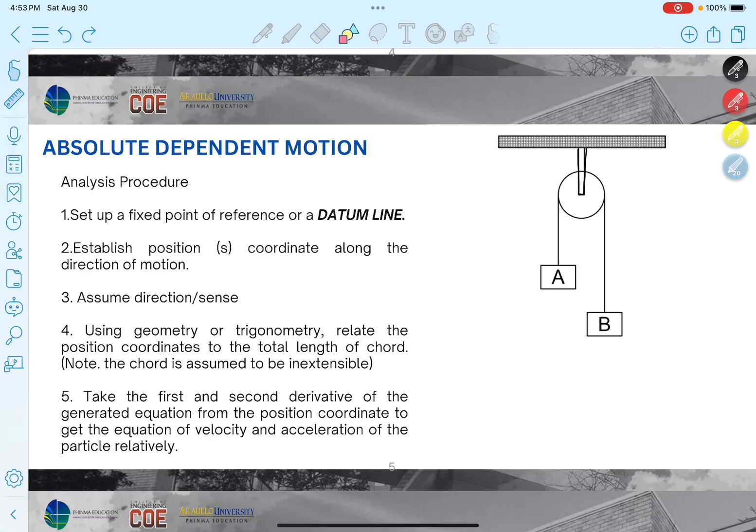So, if you read number 2, establish position or S coordinate along the direction of motion. Ibig sabihin pala, yung point ng particle na kinoconsider mo is what? I-measure mo yung distance nun from the datum line.

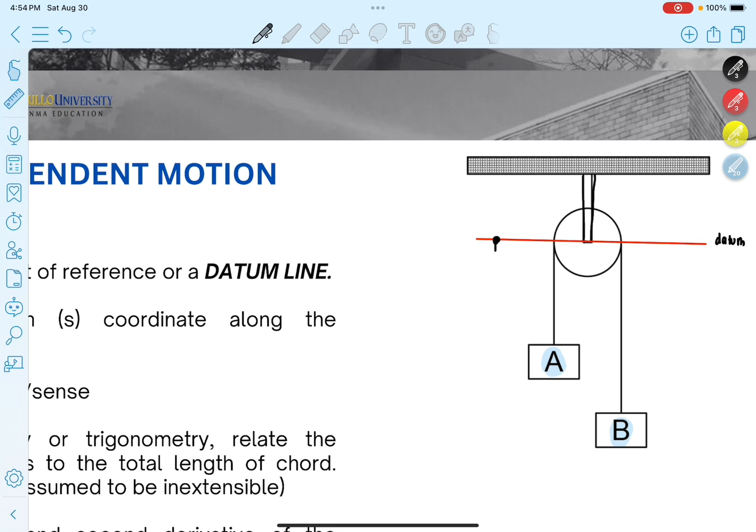Ibig sabihin, ano ba yung mga points natin dito? We have what? We have the point or the block A and the block B. Ngayon, kukunin mo daw yung position coordinate nila with respect to the datum line. So, ano ba yon? If we're going to get the position, ito yun. From datum line, bababa ka dito sa point A mo, okay? Ngayon, yung magiging distance mo dito, we can call it as our SA, okay?

Now, para naman sa B, okay? Yung B naman natin, guys, is what? Ito yung magiging position niya, okay? From datum line, we can call the position of letter B as SB, okay? So, ibig sabihin, yari na tayo for the number 2 na establish na natin yung position coordinate.

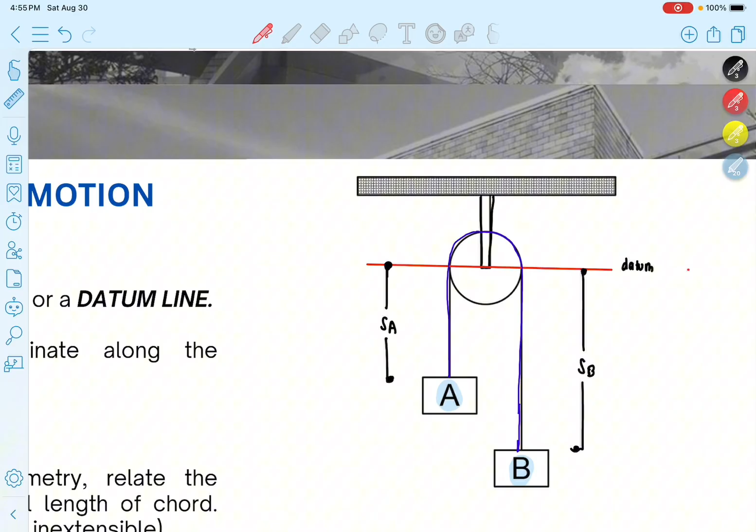So, yun. Now, for number 4, i-relate natin, guys, itong mga direction or yung mga position coordinate na to. Okay, such that yung letter B is i-connect or i-relate natin siya. Paano? Using the geometry or trigonometry, relate the position coordinates to the total length of the chord. Ibig sabihin pala, kailangan mo ma-relate yung position coordinates mo in terms of this chord. Ano yung sinasabing chord natin? Ang sinasabi nating chord dyan is this one. Ibig sabihin, i-relate natin dyan.

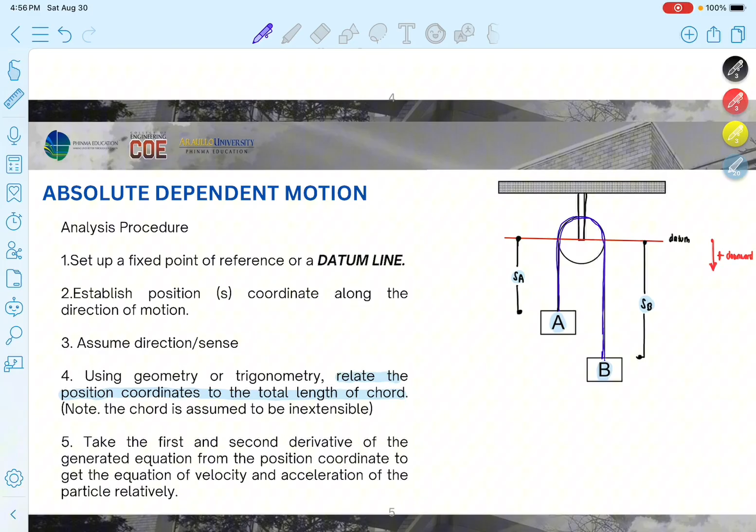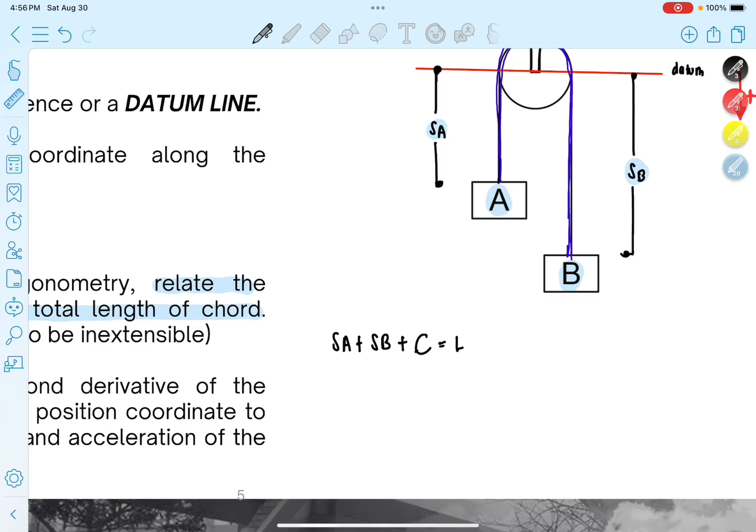Okay? Ngayon, pwede ba nating i-denote that SA plus SB plus C equals to the length? Ngayon, kung mapapansin nyo, this is the total length of the chord. Ibig sabihin, yung haba ng chord mula dito, from this point up to umikot siya papunta dito, yun yung tinatawag natin as the L or the length of chord.

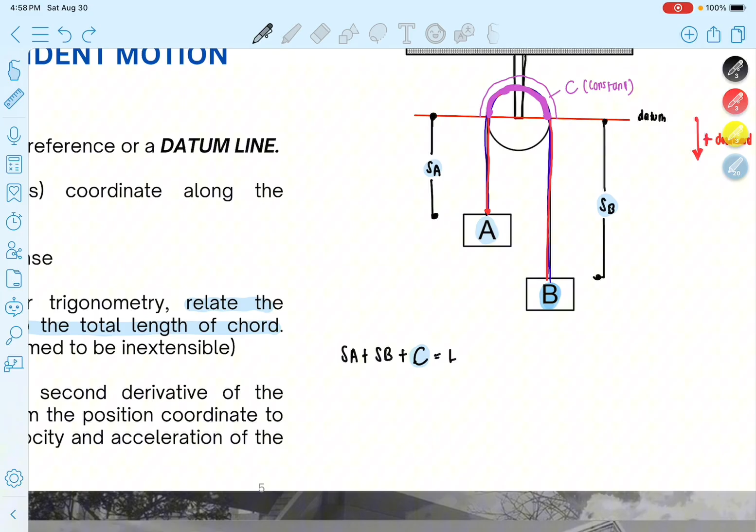Okay? And then for the step number 5, basically, take the first and second derivative of the generated equation from the position coordinate to get the equation of velocity and acceleration. So simply, pagka kinuha mo yung first derivative niyan, given that this L, again, this is an inextensible chord, this is constant, and this is also constant. So, if we're going to take the first derivative of both, yung SA natin will be VA, okay?

The first derivative of SA is VA, and the first derivative of SB will be VB, okay? And the derivative of constant, C and L, is equal to 0. Ibig sabihin, kung equal to 0, maka-cancel out na yan, di ba? Kasi ang derivative ng constant is 0.

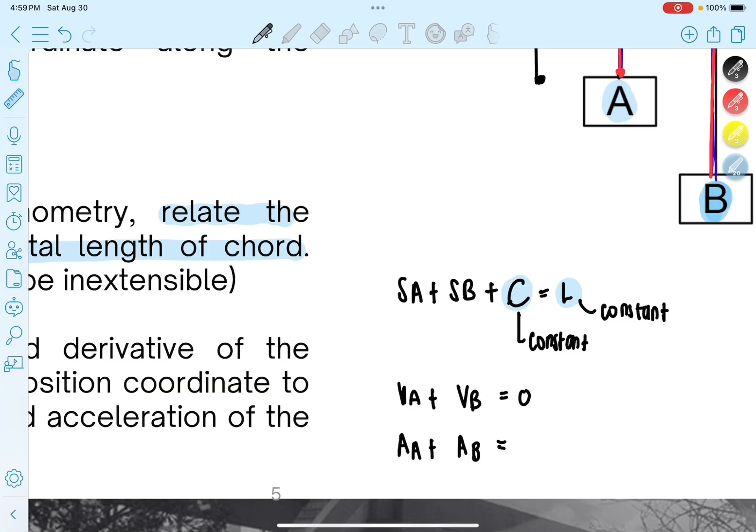For the second derivative naman, we have the AA plus the AB; also the derivative of 0 is equal to 0. So yan, technically ganyan lang yung magiging relation natin for our absolute dependent motion. Ganyan lang yung magiging steps natin. So para mas maintindihan natin, I think mas okay if we're going to take an example. Okay?

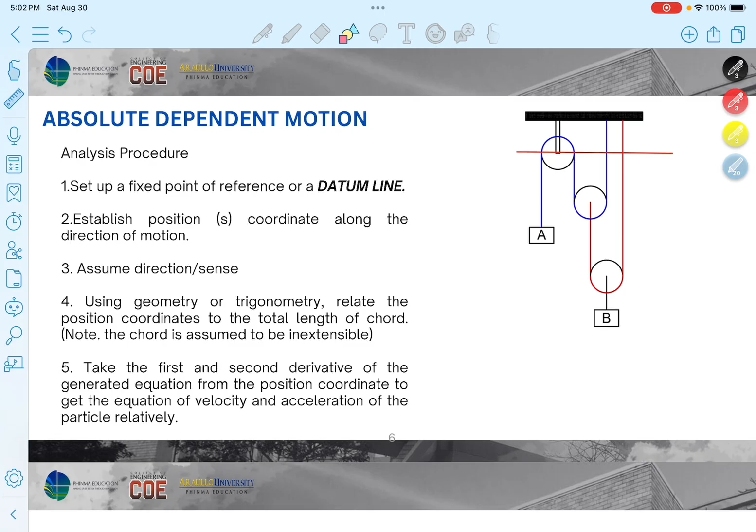Pagka nag-establish tayo ng datum line, basically always pick the fixed pulley. Ito ba fixed pulley ba yan? Hindi. Ang fixed pulley is yung nasa taas, yung naka-anchor dun sa support natin. So if you're going to get the datum line, safe if sabihin natin na ito yun. Okay, so if we're going to name it, this will be our datum line.

Okay, next step naman is establish. Dito tayo magkakaroon ng problem. Bakit? Kasi kailangan ma-relate natin yung equation into one, pero magkaibang chord sila. So mas mainam if we name this pulley as letter C. And then, establish position coordinate along the direction of motion. Ibig sabihin,

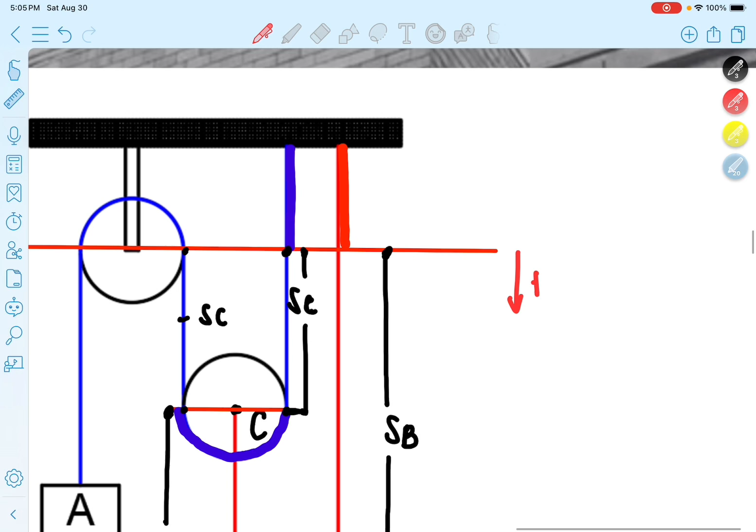Now, ang next naman na gagawin natin is assume the direction. Basically, ulitin lang natin yung kanina: that our direction is positive downward. Okay?

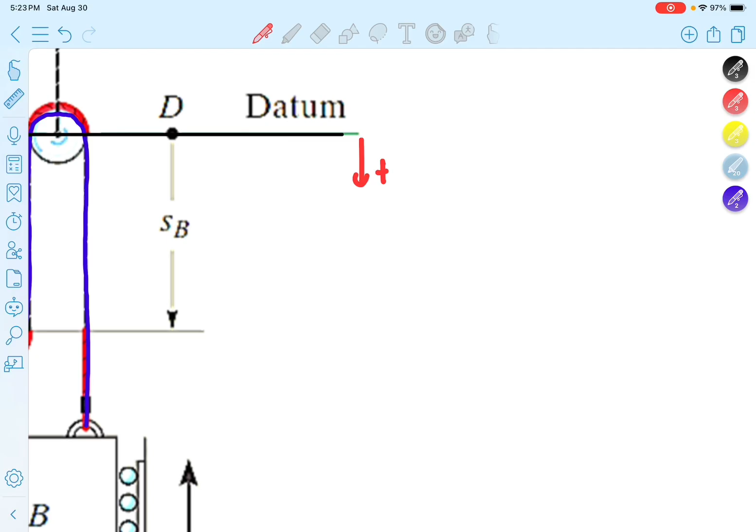Downward, okay, so positive is downward. So the next one is let's establish our position coordinate from up here. Mula dito sa taas, guys, itong point na to, mula dito sa taas hanggang dito sa baba. Can we say that this is our SA?

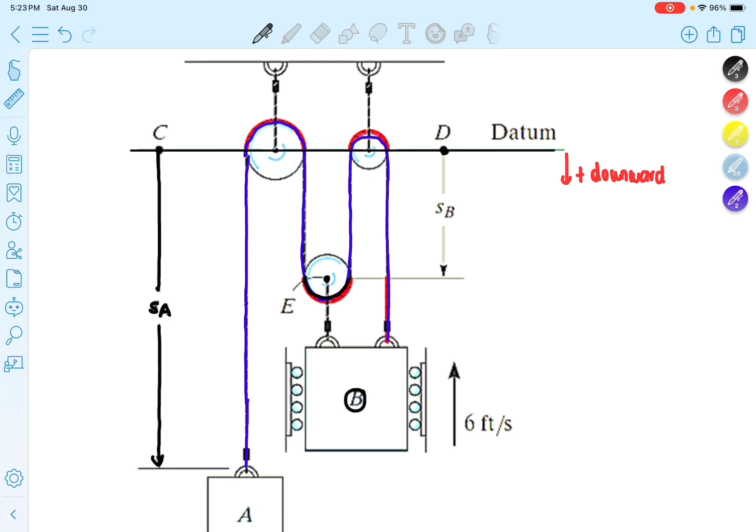Okay, so that's our SA. And then from the datum, bakit hindi dito nilagay guys? Kahit saan naman siya ilagay, but yung pulley natin dito, if gagalaw yung object mo dito, ang tendency niyan is gagalaw din tong B mo na to. Gagalaw din yung B mo na yan paakyat. Ibig sabihin, dito na lang tayo mag-establish ng datum, okay, ng position coordinates sa pulley na yan.

Anyway, kung pagbabasihan mo lang naman is at this point, kung mapapansin mo, okay, at this point is constant naman siya. Ibig sabihin, hindi naman tayo mababago along this point. So pwede doon mo na i-reference yung point B mo. Okay, so technically, ganun lang.

And now guys, kung titingnan nyo mabuti, pwede na ba natin kunin yung equation niya or pwede na ba natin siyang i-relate? Actually yes, pwede. So yung total length natin, pangalanan muna natin - pwede ba natin ituring to as C1? This will be your C2, o yung kabuuan na to guys, yung kabuuan na yan is your C2, constant 2. Below the reference line dyan, hindi naman yan magbabago. And of course, the C3. So kung ganun, can you say that your length is equal to SA plus C1 plus, kung mapansin nyo, yung SB natin is equal to S

SB yan, SB dito, tsaka SB dito. Ibig sabihin yung SB na to ay nire-represent niya ng tatlong length ng chords mo. Ibig sabihin plus SB. O sige, SB, hiwa-hiwalayin ko: SB plus C3 plus another SB plus that's C2.

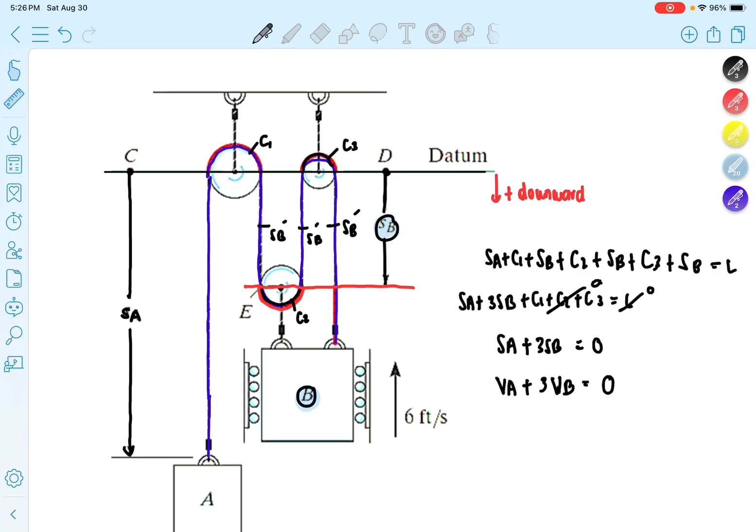So kung mapansin nyo guys, ang given natin dito is our velocity. Kung ganun pala, ibig sabihin lang, kung given yung velocity natin ng VB, upward siya, di ba? Yung VB mo is upward. Therefore, yung VB mo na 6 feet per second should be negative 6 feet per second. Bakit? Kasi nga ang assumption natin guys is downward yung positive, okay? Ibig sabihin, ipa-plug in mo ngayon itong negative 6 na to to get the VA.

Okay, include mo yung sign, negative 6 VB. Okay, ang 3. Wait lang. 3, ang VB natin is negative 6, equal to 0, di ba? And then your VA ngayon is equal to 18 feet per second. Kung bakit naging 18 feet, again, magiging 6 times 3 is negative 18. Okay, and then equal to 0. So pag tinranspose natin, VA is equal to positive 18 feet per second.

So nag-positive siya. Therefore, downward siya, okay. So yun lang, ganun lang bale. So this will be your final answer. Okay, so that's our example.

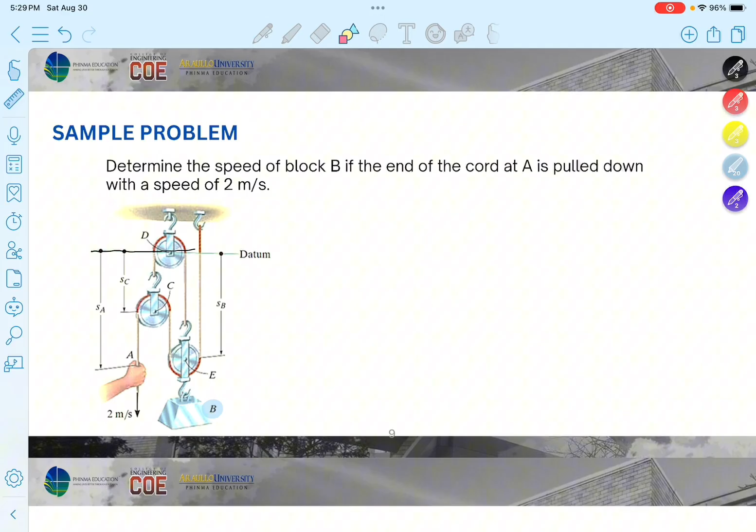Ang distance lang i-consider nyo is kung nasaan, hanggang saan yung mga ropes natin at yung mga constant. Okay, kung titingnan nyo guys, medyo complicated tong pulley natin nito, di ba? But if you can see, unang step natin is to establish a datum. Lagi na lang tayong pinangunahan, may datum na agad. Ibig sabihin, that's our datum, ito ngayon yung datum natin.

Mag-establish tayo ng sign convention natin, considering downward is positive. Okay, so downward is positive. Ngayon naman, i-name na natin yung mga chords natin. Ibig sabihin, i-name mo kung ano ba yung mga chord na magkakadugtong.

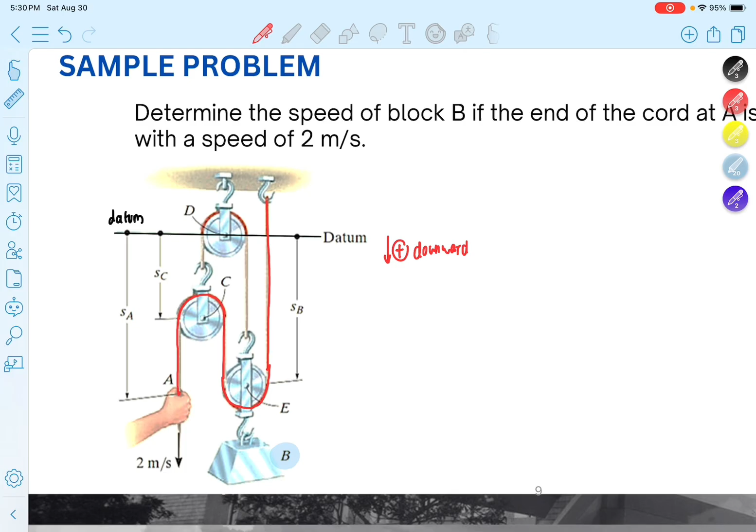Kung titingnan mo mabuti, mula dito sa point A na yan, red muna. Actually, dalawa kasi yan, yung isang chord natin is ito. Ibig sabihin, yung for our next chord naman, ito yan. Our next chord naman, kung titingnan nyo mabuti, ito, is hanggang dito naman yung mararating niya. Yan yun, yan yung kino-consider natin guys hanggang point na yan. Yan yung next chord natin.

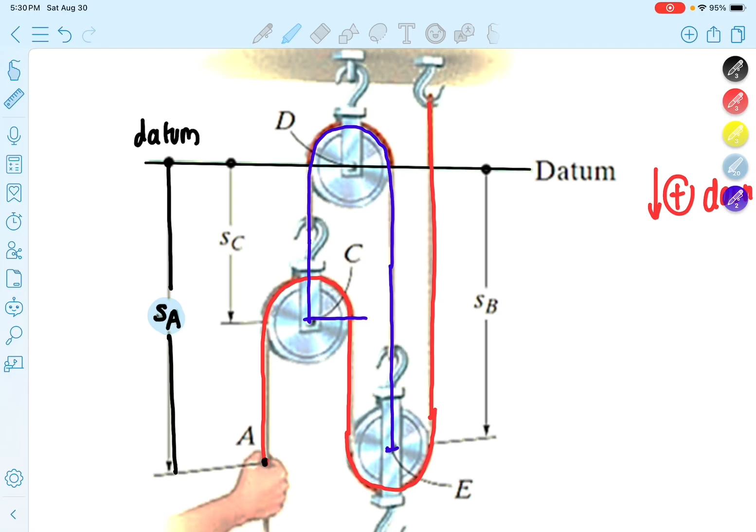For the distances naman guys, kung mapapansin nyo, from this datum down to point A, can you name your distance as SA? So pwede, from datum hanggang dun sa point A is SA. For SC naman guys, at this point, down to this point, is your SC. Ibig sabihin, this is your SC, mula dito sa datum hanggang dito sa point na yan, is yun yung SC mo. And now guys, ang tinutukoy natin na SB dito is what?

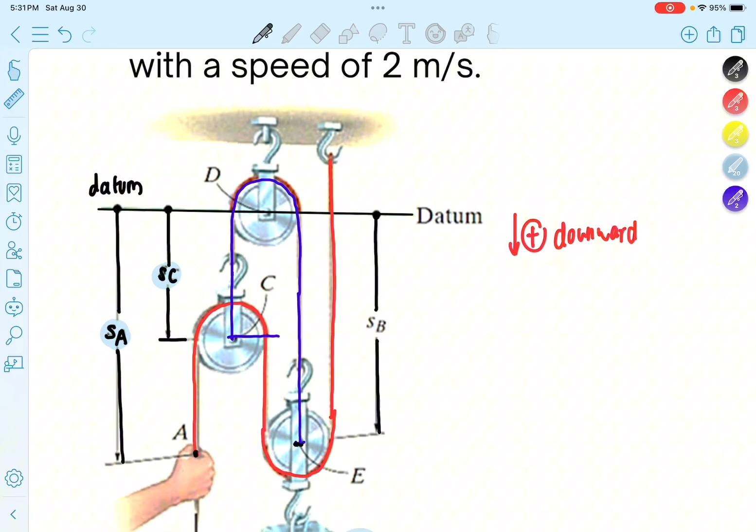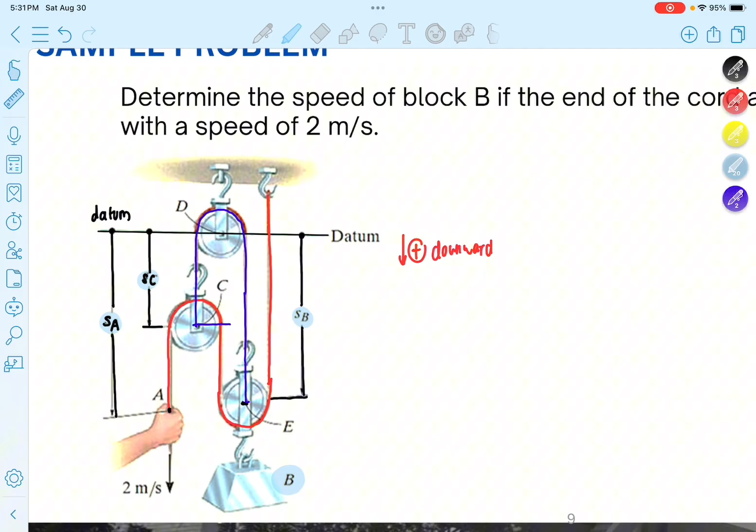From dito, down naman hanggang dito sa baba, or hanggang dito sa point na to, this is our SB. Kakaintindihan ba? Ibig sabihin guys, by the way, kaya yan naging SB kasi nga yung length, yung pulley na pinagkakabitan ng B natin is equal lang naman doon sa may length nung other pulley, nung other cord natin.

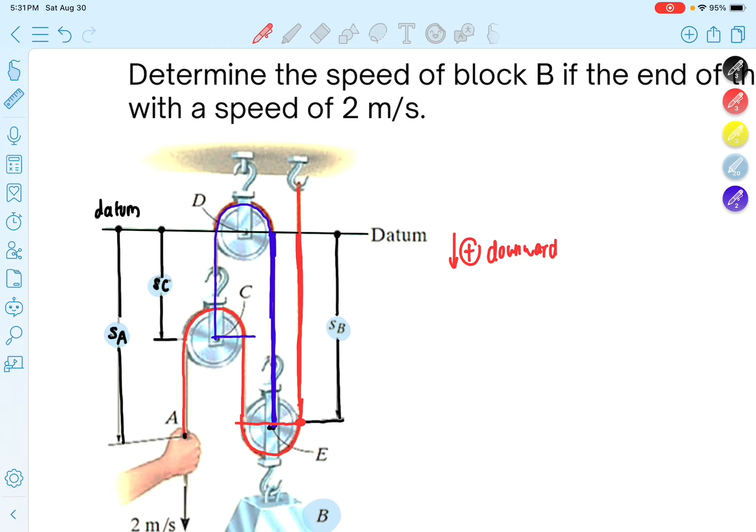Ibig sabihin, eto yan, okay, yung mula dito hanggang dito, is equal lang kasi guys, dito sa may from point here, which is eto nga kasi reference point natin yan, hanggang dito naman sa may point na to. So ang tendency is magiging equal sila, even for different cords.

So iname muna natin yung para sa cord, sa first cord natin, which is yung red. Ibig sabihin, yung length pala ng cord na una natin is eto, plus the constant. Tama? Plus the constant. Pero okay lang ba guys na wag na nating i-plus yung mga constant.

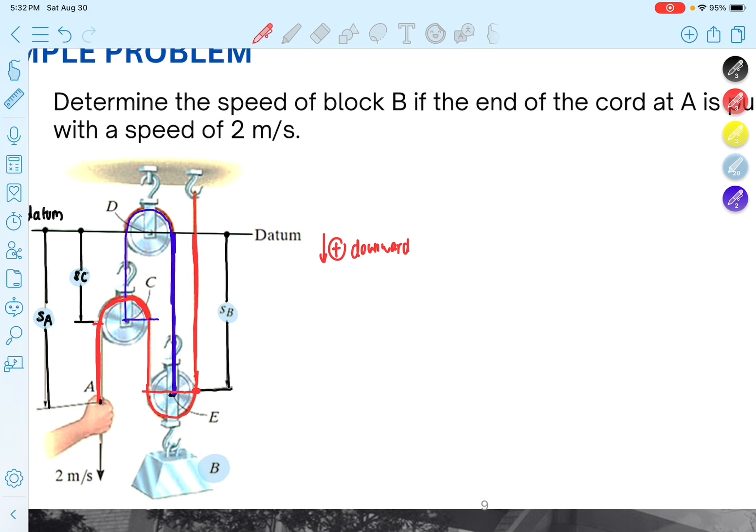Sige, in-name ko na lang siya, so I will name it. Gagawin kong green, siguro medyo brutal yung color, medyo bright, sige ito na lang. So I think gagawin ko na yung mga constant natin is papakita ko lang. But, again, hindi na natin siya isasama sa computations natin para mas ma-simplify natin yung computations natin.

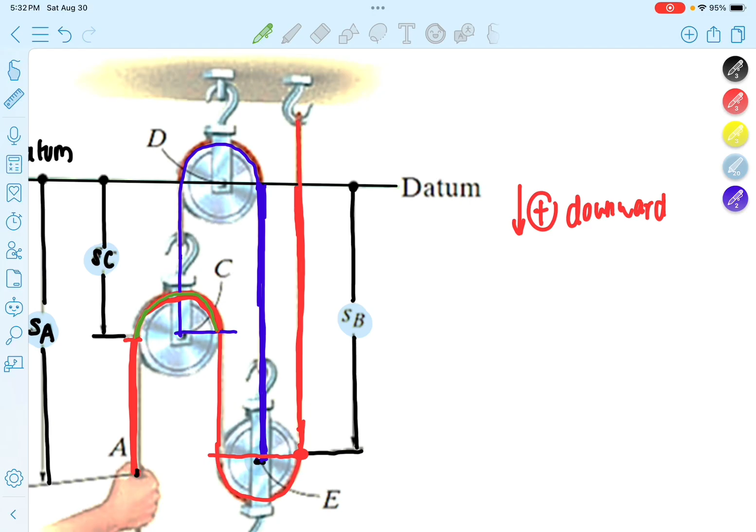Yan, and then ito yung another constant natin. Tama? Ayan yung another constant natin. Ito pa yung isang constant natin. Ayan, hindi nagbabago towards yan. And then ito pa.

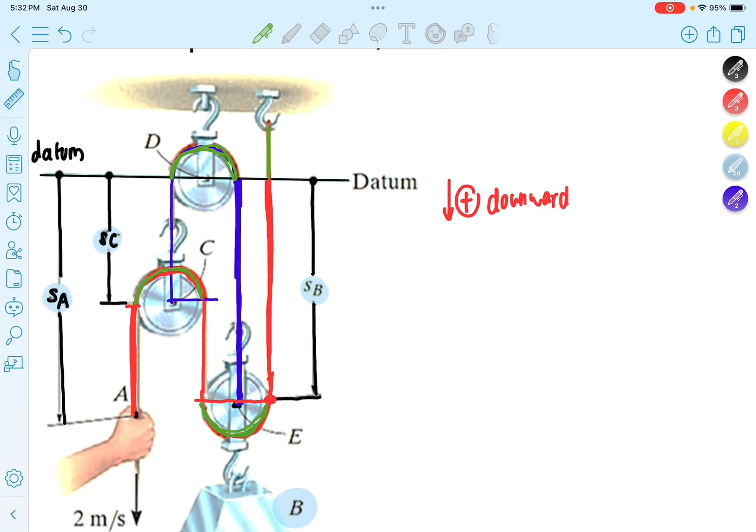Ibig sabihin pala, ang kailangan lang natin na length, for cord 1, ayan, lalagyan ko legend. For cord 1, yung red natin is mula dito sa baba na to, hanggang dito. And then, mula dito naman, hanggang dito din. Knowing guys na yung distance na to, is different dito, kung mapansin nyo, yung SB is different from SA. Okay, so yun, so kung titingnan nyo, ayan din. Huwag nyo isipin na pantayan dalawa na yan kasi hindi pantayan.

So around something like yan, just ito nandiyan yan. Okay, so for ito pa. For another length naman is mula dito naman up to this cord, yun naman yung consider mo. So for length na 1 natin, can we say that SA, yung SA natin na buo na to, minus yung length na to, will be yung length na to.

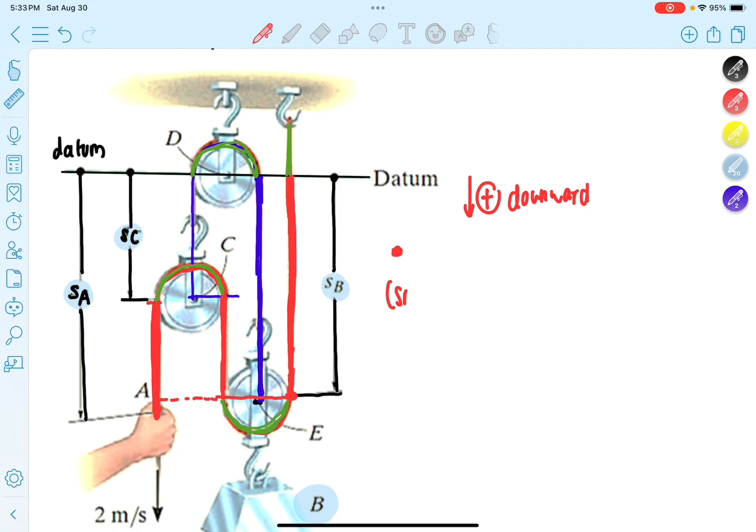Tama? Ibig sabihin that SA, SA minus SC. Ibig sabihin, yung part na to is SA minus SC. Okay, so kanipisan ko nga, masyadong makapal. So yan, boring ko muna. Ulitin natin. Ay, nabura.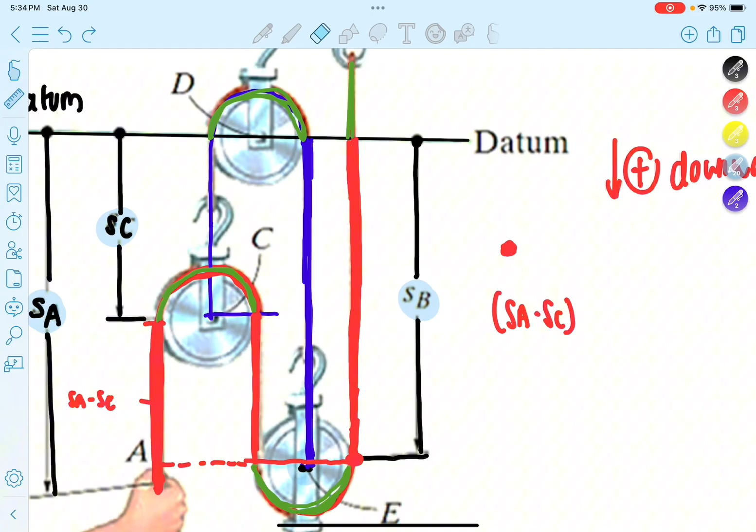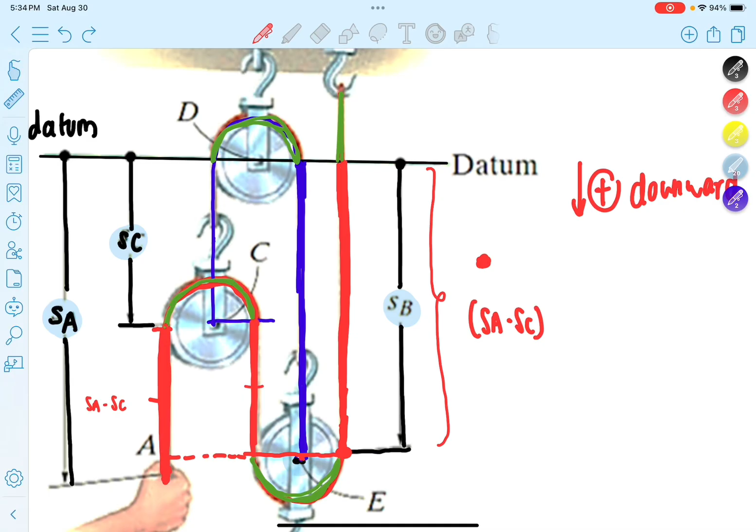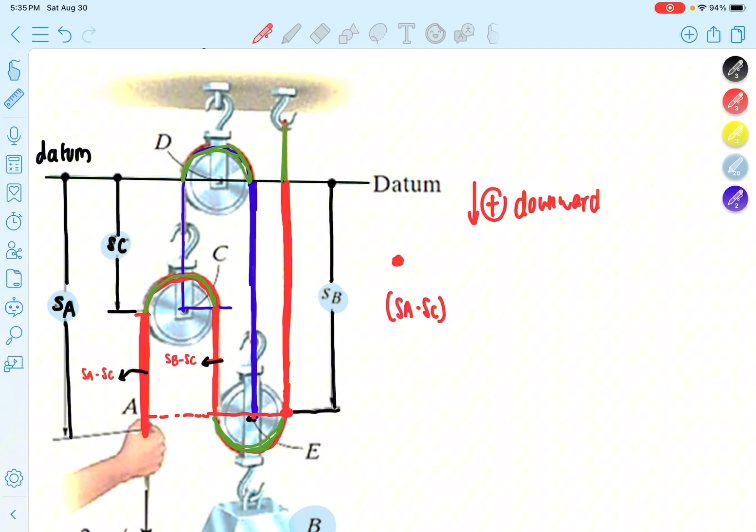Okay, so this will be your SA minus SC. Now, can we say that your SB, given that this is equal to this, that SB minus this point, which is also SC? So, can I say that this length, this point, is SB minus SC? Let's highlight this portion, that's this one, and that's this one. Now for the last one, simply, it's just SB. So, the length up to the top is just SB. So, SA minus SC plus SB, okay, click.

Plus SB minus SC, plus SB, equals the length of cord 1.

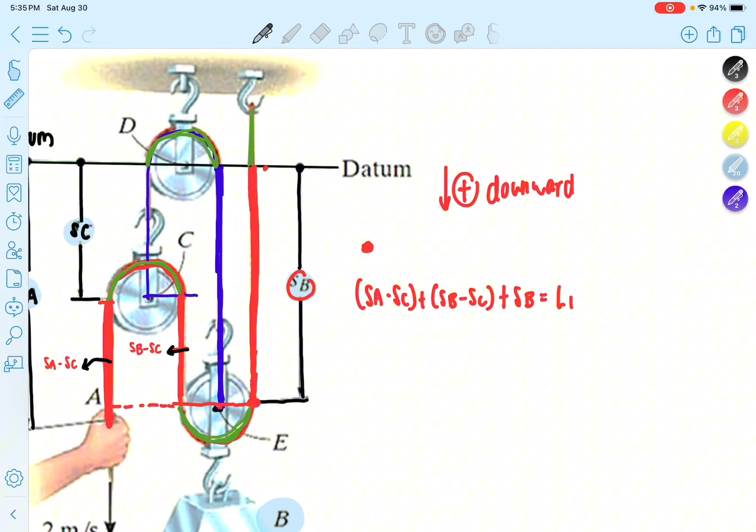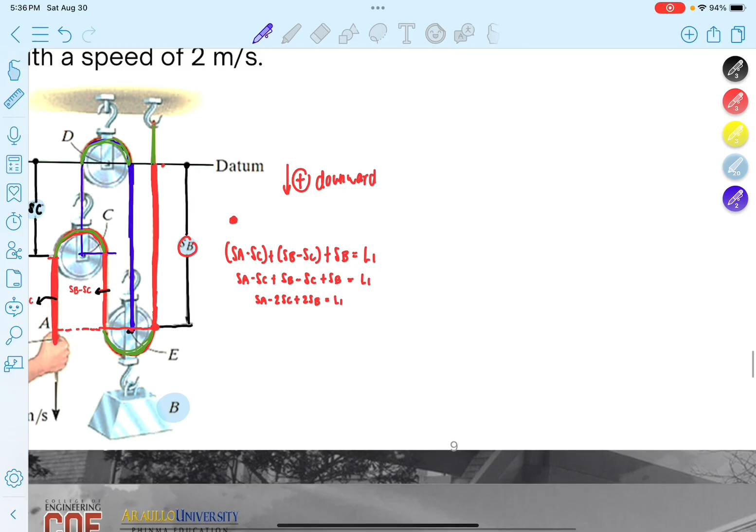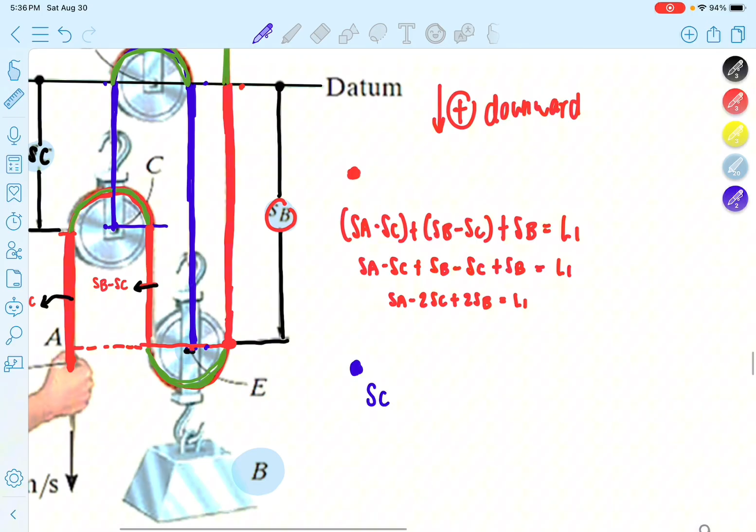Now, for the second cord, simply, SC is the length of this cord, meaning SC from this point up to this point, and SB from this point to this point. So, SC plus SB equals the length of 2.

So, let's represent it again in terms of C, since this was our equation earlier, and again we're relating the SB and the SA. So, if we relate that, can we say that SC is equal to L2 minus SB? Basically, yes. So, that's it now.

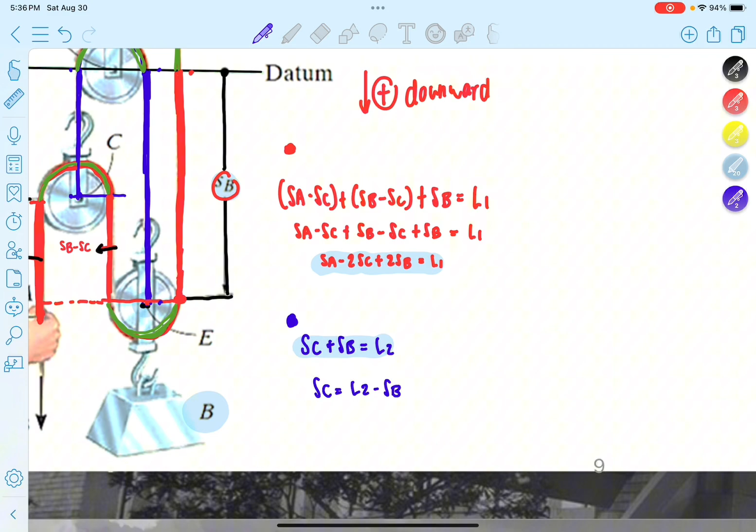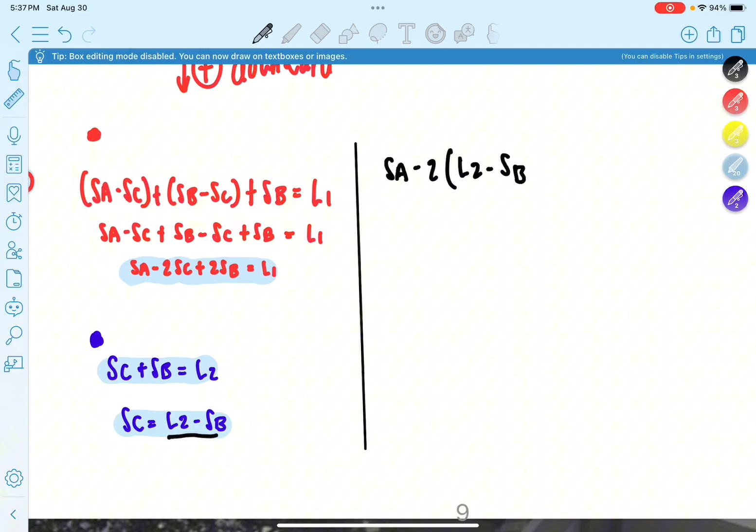And then plugging that into our equation, can we say that what happens is SA minus 2, which is our SC, is L2 minus SB, L2 minus SB, plus 2SB equal to L1. So that works.

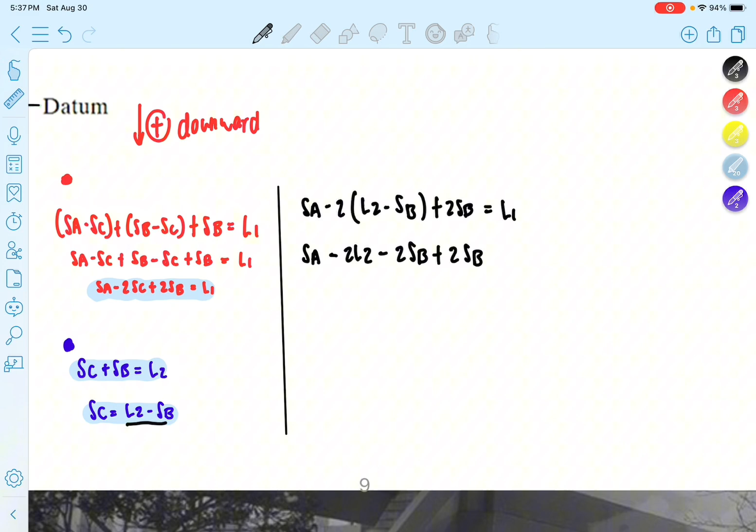And then distributing, SA minus 2L2 minus 2SB, plus 2SB, simply minus 2SB, wait, is that right? So minus L2 minus SB, so L2 minus SB, let's plug that in there, okay?

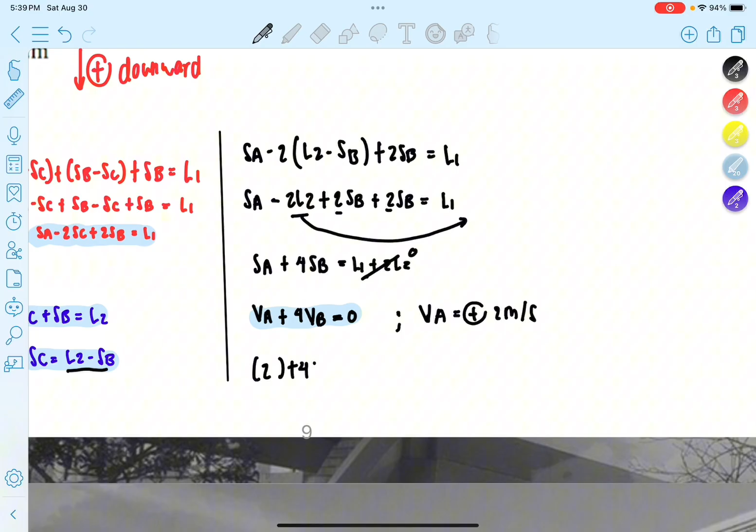Now, what do we plug in there? If we plug in the value, knowing that our 2 meters per second is pulling downward, pulling our force downward, that means your VA is equal to positive 2 meters per second. Meaning, your VA equals positive 2, plus 4VB equal to 0.

And then it turns out that VB is equal to, calculating, you get 2 plus 4VB equal to 0. You get negative 0.5 meters per second.

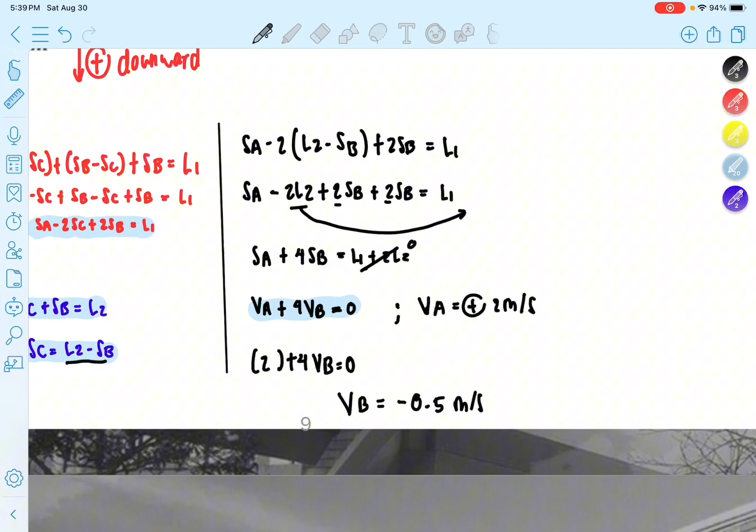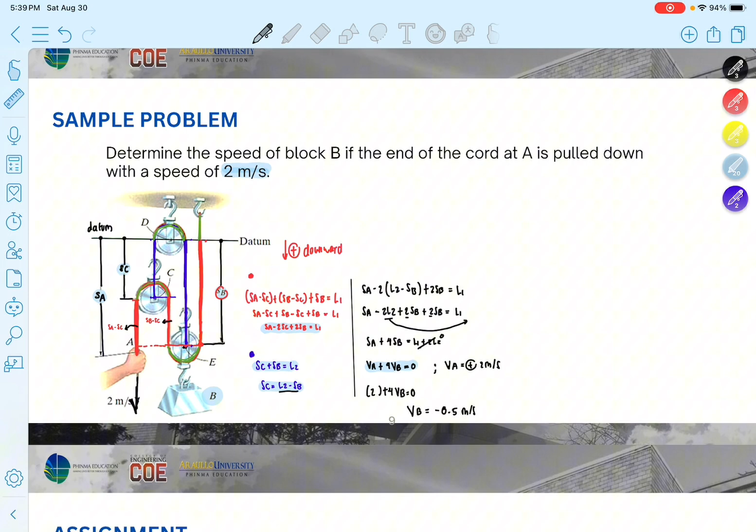That means if it's negative 0.5 meters per second, that means the direction of your VB now is not downward since it's not positive. Therefore, the direction of your VB, VB equals 0.5 meters per second, is now upward, since you got a negative, whereas your assumption was positive downward, and you got negative, therefore your direction will be upward.